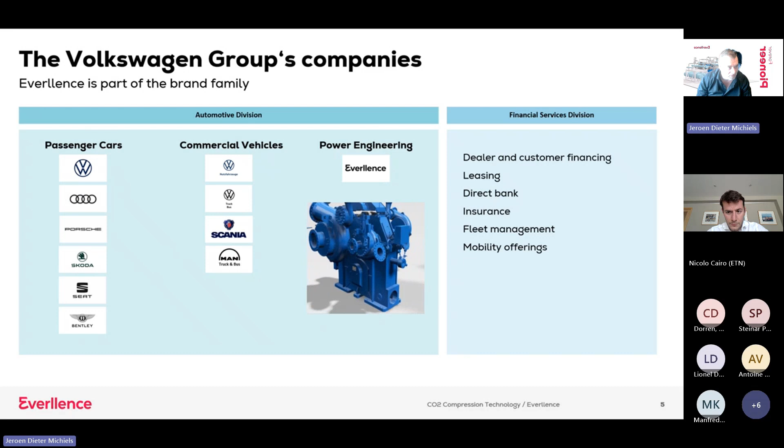So a little bit about the company. Like Nicolo said, we changed the name from MAN Energy Solutions to Everllence. It's building a new brand for a company without the MAN truck and bus idea behind it as well. So the company is a part of the Volkswagen Group. As you can see here, the passenger cars, the commercial vehicles, also known as truck and bus, and now Everllence for the engineering part. We're the smallest part of the entire group, but they see us as the engineering part of the organization.

We have roughly 15,000 people working for us, present in over 50 countries, 140 sites all around the world, existing over 260 years already. Started somewhere in Oberhausen in the St. Antony, and from there it grew, integrated several companies, parts of Sulzer, Borsig, you name it. And for now, it's also a good step to make a new name with all brands under one name.

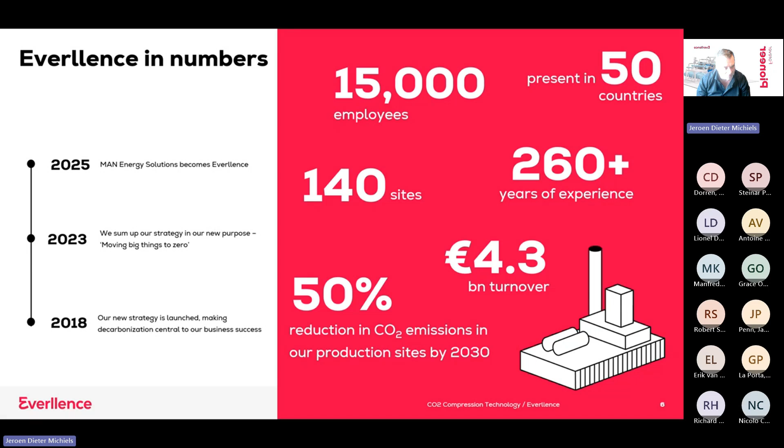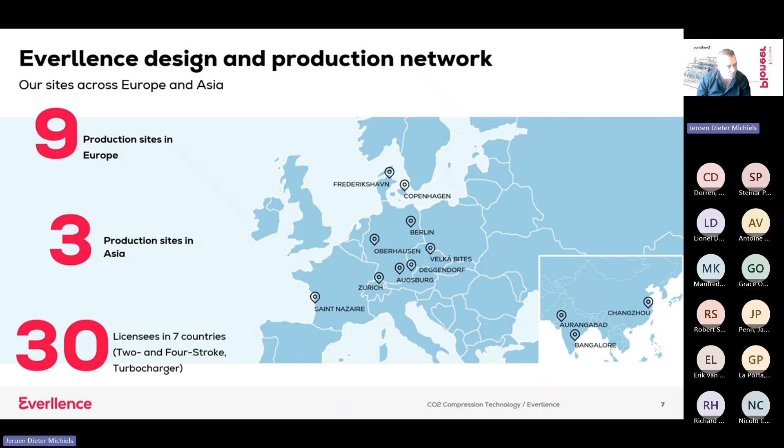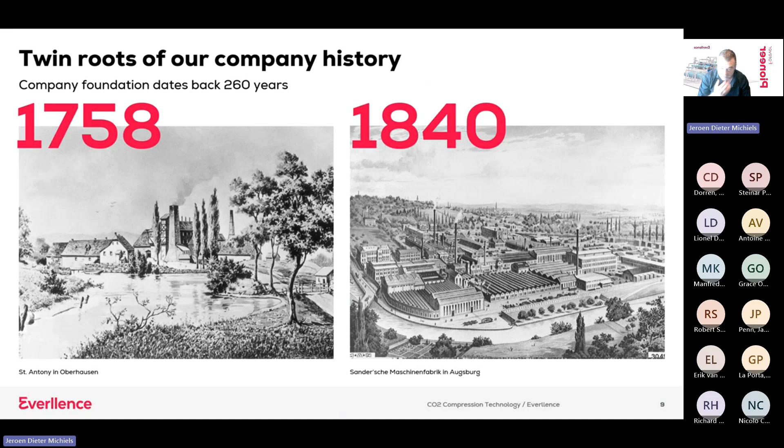These are the production locations, mainly in Europe, a few in India, one in China. We have service locations all over the world. Because we also have a marine side to our business, there are also a lot of service locations based in coastal areas. Started in 1758 at St. Antony, like I already said. Headquarters founded in Augsburg in 1840. Yeah, so this is how it all began, with Mr. Diesel in the middle of that.

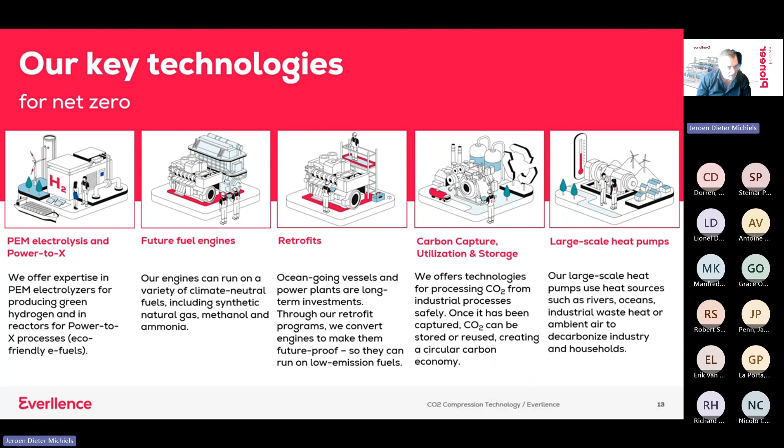Our strategic direction: moving big things to zero. We are aiming to work on decarbonization globally, and we do that with our equipment. So part of it is power to X. We're producing reactors to make methanol or SAF or other synthetic fuels. Future fuel engines for the marine side. We're developing ammonia engines right now, retrofits on ship engines so they can run dual fuel, partly on methanol, the carbon capture, of course, and large-scale heat pumps up to 100 megawatt thermal.

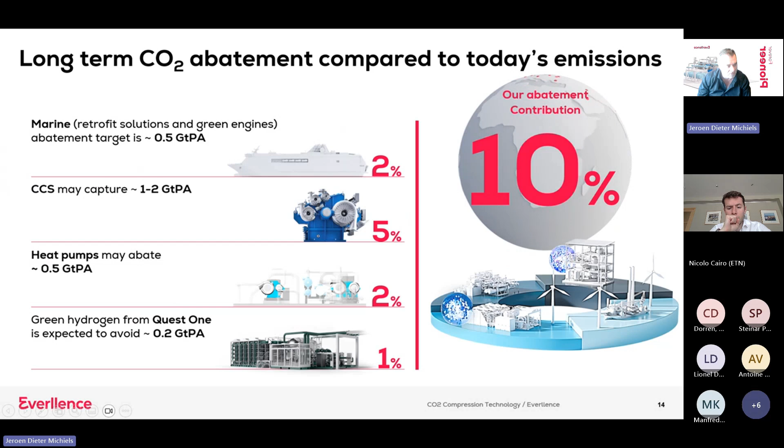Our goal is at least to decarbonize globally by 10% by the use of these equipments. So from the marine side, CCS, heat pumps, but also the electrolyzers we produce within our sister company, Quest One.

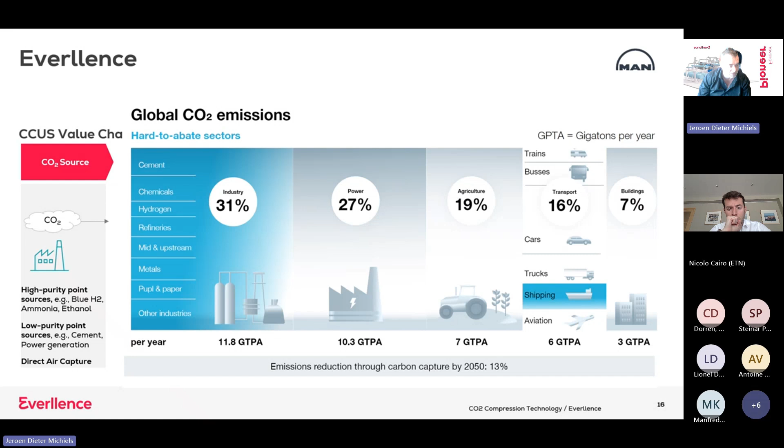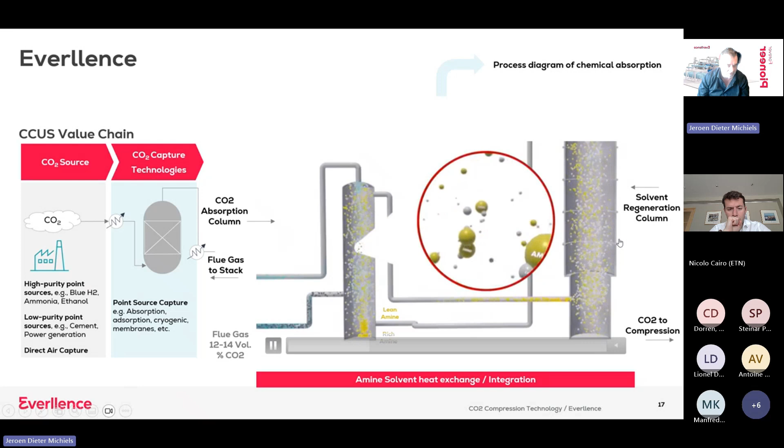Then I come to the carbon capture part. If we're looking at CCS, we first of all have to look at where CO2 is hard to abate. It's the known players, I think: the cement industry, chemicals, refineries, but also the power industry. Then you have to capture your CO2. There are several types of capturing systems on the market. This is an amine-based system based on absorption, where the CO2 is linked to amine, then freed, and the amine returned to the column. And the CO2 is then processed further to the compressor. That is where we come in.

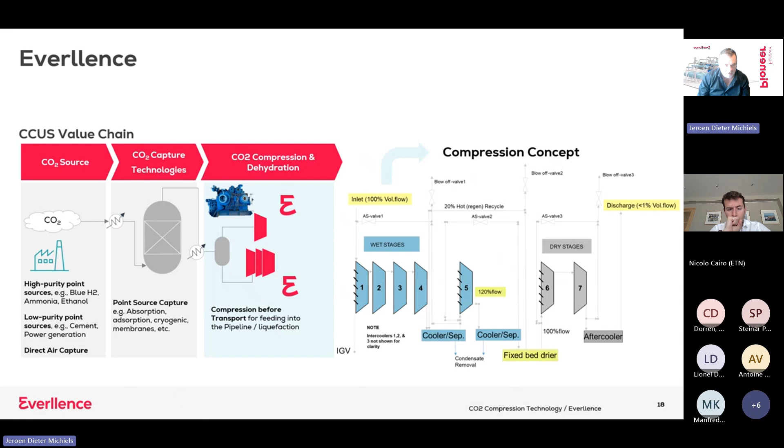We provide compressors. This is an example of a CO2 compressor, a 7-stage machine. The first 5 stages are for wet CO2 in this case, and the last 2 for dry CO2. Then if you have compressed it, you have to think, what do you want to do with it? Do you want ship transport, truck transport or pipeline? It all differs in what way you want to compress your CO2.

So there are a lot of options for the use of CO2. The main focus right now is sequestration, where you can, for instance, do what they do at Porthos and sequestrate it offshore in depleted gas fields, or onshore, which is a little bit harder to realize in the western part of Europe. Then we can also create, for instance, a liquid lake of CO2, not that popular, where the water pressure and temperature will keep it down, and dissolution, not very popular, especially with environmental groups.

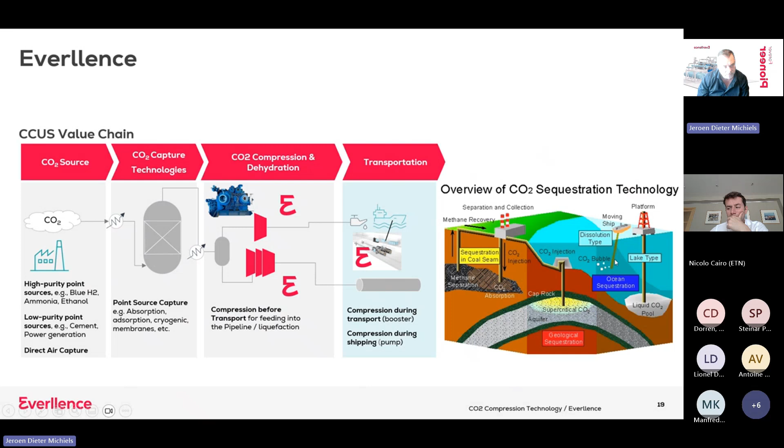Also have to look at the utilization part. So CO2 we can use in combination, for instance, with hydrogen with power to X, but also you can use it in the fertilizer industry or mineralization. There are several options for that. Only the majority of the solutions is right now sequestration.

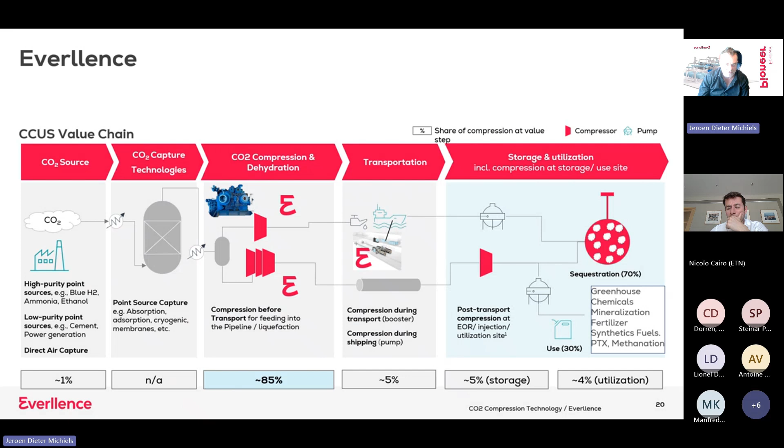Then if you want to transport it, you can make it a gaseous form for short-distance transport, similar to what happens at Porthos. Liquefaction for ship transport, for instance, Northern Lights, or supercritical for long-distance pipelines.

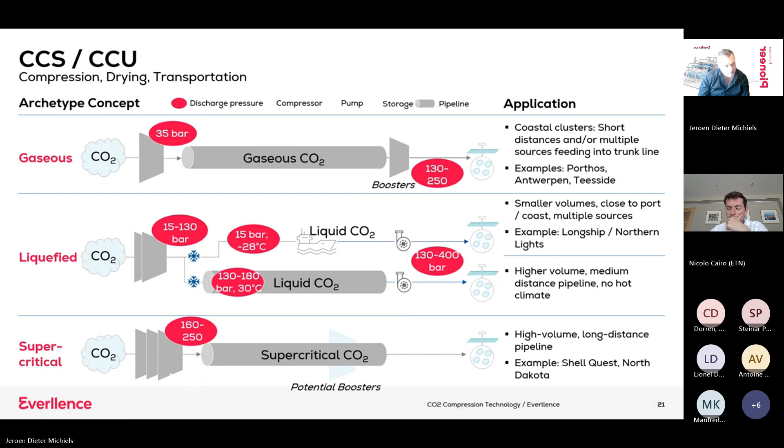Then we have to take a look at the technology readiness level. The capturing part, like I said, there are varieties of capturing systems. So absorption, membrane systems, cryogenic systems. There are a lot of new solutions coming to the market. Solutions that are made better over the years. But again, it depends on how much CO2, what is the purity of the CO2 you need. And that's an important part to look at.

If you then take a look at transport, pipeline, shipping, but also trucks and rail, but that makes it more expensive for the transport. Utilization part, there are a lot of utilization possibilities. Some are ready for market, some are still in development. And then the storage, EOR, enhanced oil recovery, is one of them, where you repressurize the oil field to take out the remaining oil, or leave it in depleted gas fields, for instance.

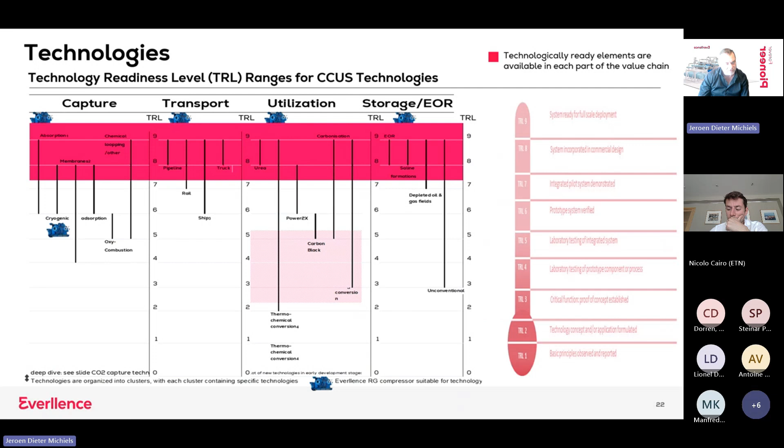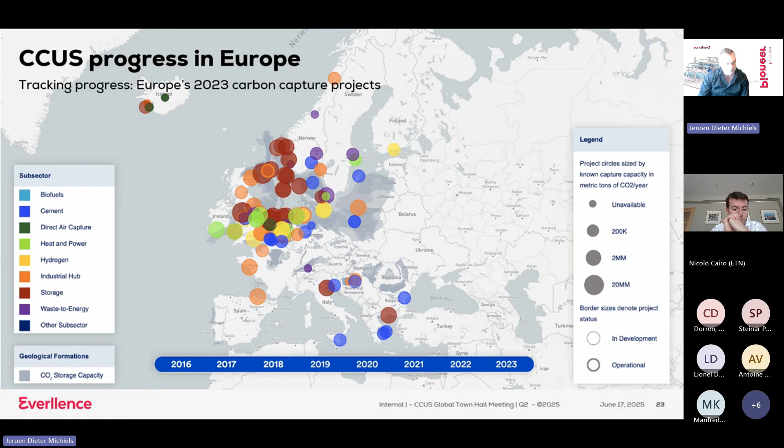So this is what happens in Europe in the last years up to 2023. A lot of projects have been developed, are under development, are being built as we speak. The Northern Lights project, that means Brevik, the cement factory, is up and running. Porthos will be ready at the beginning of next year.

Then average cost. This is an example of a calculation where a coal power plant has got a CCS project. First you have to have the capturing system, so the cost in US dollars, and the share in percentage. Then the transport and compression part, and these together are the most expensive part of such a project. Then you have your injection, monitoring, and the total sum. Of course, it depends on what kind of company or installation you're having, and where you need the carbon capture.

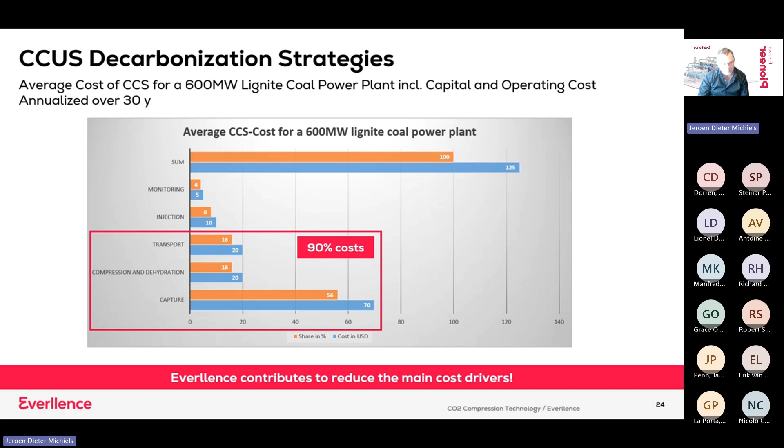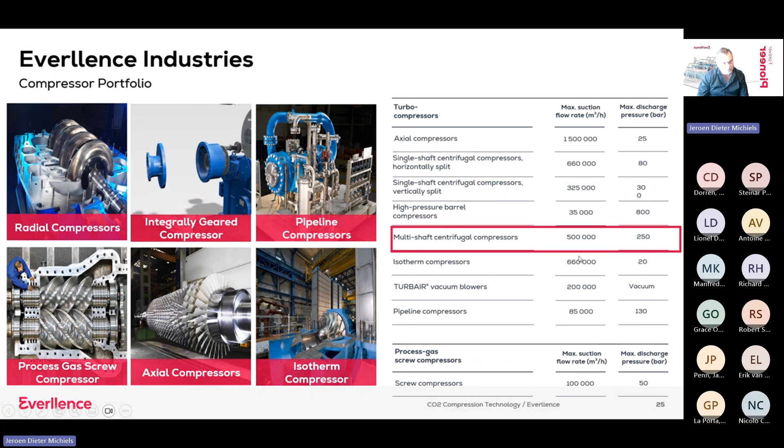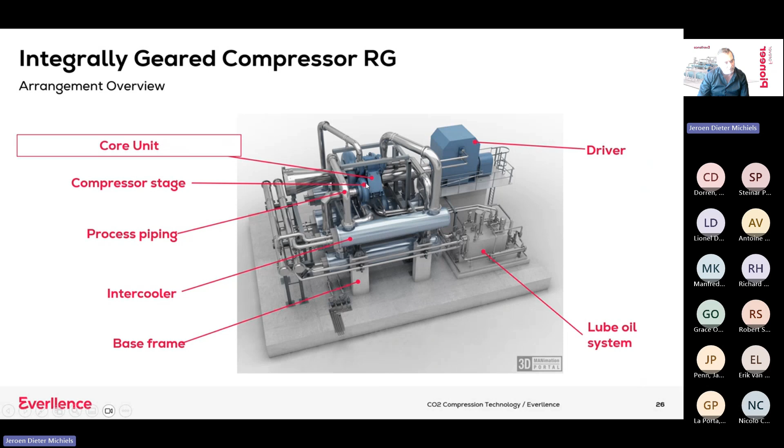We make use of an integrally geared centrifugal compressor. In principle, it's a gearbox with the bull gear driving the pinions here, where the gas is injected into the volutes and then compressed. After each stage, there's an intercooler, and then it returns back to the other side, to the next stage, and so on. We can do this up to 10 stages, but in principle, 8 would be enough.

This compressor is nothing new. We've been using it over many years for CO2, also hydrogen, nitric acid, ammonia, you name it. It's a very versatile and a very steady machine with a high availability. Can use it for liquefaction, gases, and supercritical. We can have heat recovery on this machine, less power, less OPEX. Therefore, it's a really interesting machine. It has a low footprint on the entire installation.

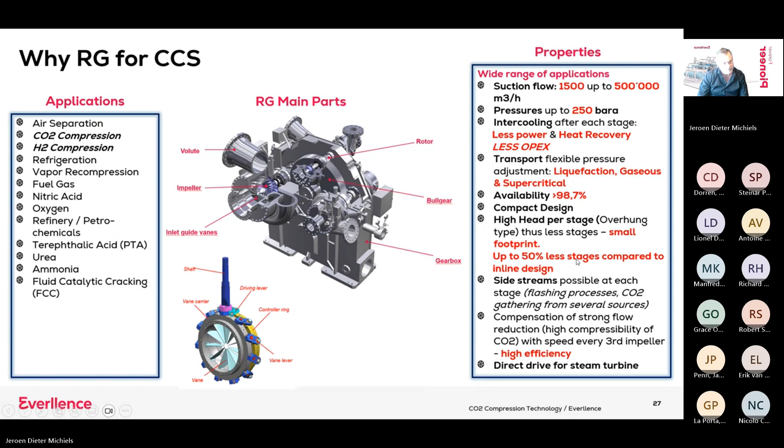And you have to take a look at the CO2 itself. CO2 is a very heavy molecule. Therefore, it's very easy to compress in big stages. And in this case, it regards compression for sequestration. Every step has an impeller, and the impeller size shrinks to a very low point where the smallest one is almost the size of a matchbox, where it runs at 40,000 RPM up to 200 bar.

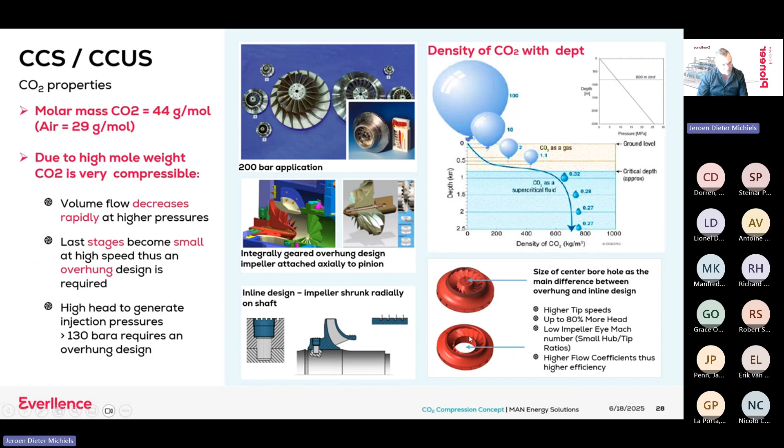The big advantage of this type of impeller is it's mounted on the front of the pinion, and therefore, if you compare it to a regular compressor impeller where it's strung onto the rotor itself, you have a much bigger surface area, and therefore can compress more and faster than a regular impeller.

If you compare it to an inline compressor that we also provide, this is the reason why we choose an integrally geared centrifugal compressor for CO2, because it needs less steps. So in 8 steps we can go up to, in this case, 160 bar, where with an inline compressor you will need 15 steps. 1 machine versus 2 machines, 1 engine, 2 gearboxes, and all this has an effect on your CAPEX and OPEX.

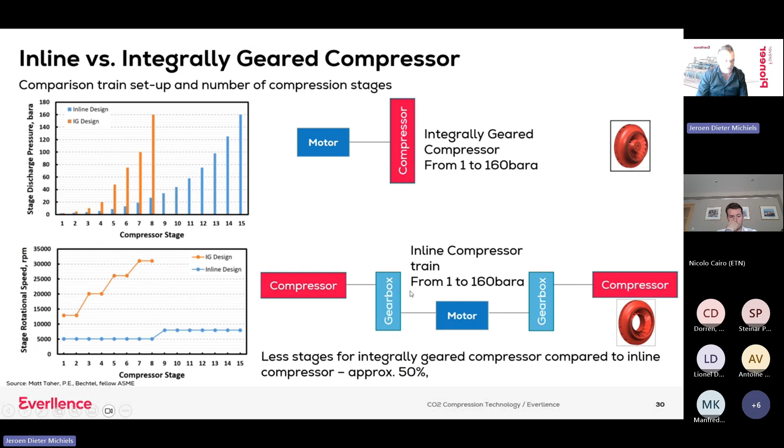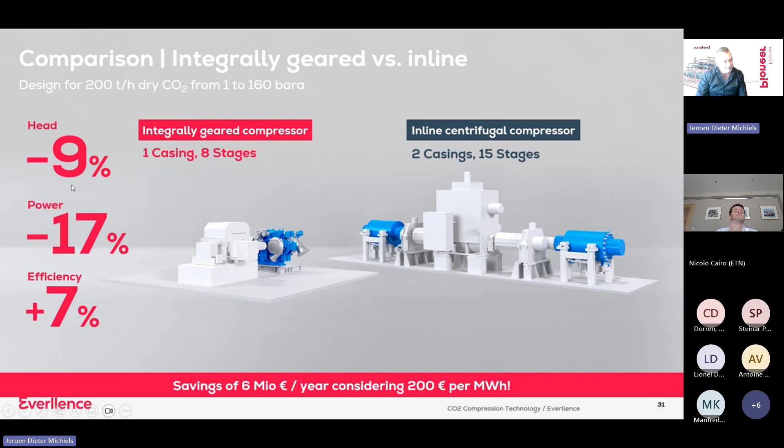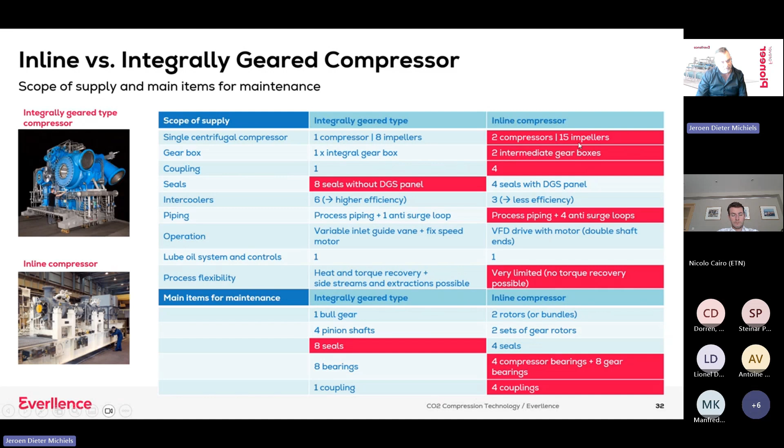So if you look at the comparison again, the integrally geared has a lower head, uses less power, and is more efficient. It needs less parts. As you can see here in the red, the amount of impellers you need, gearboxes, and so on, and a lot less people to work on it on your overhauls. So that makes it, especially for OPEX, really attractive.

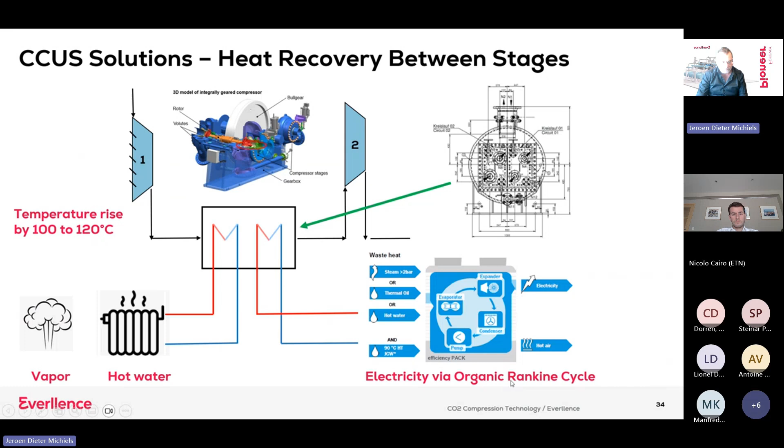We can do also heat recovery between stages, temperatures up to 120, perhaps in some cases already higher. You can produce steam or hot water. You can also have your organic Rankine cycle for energy recovery. So it's a very versatile machine.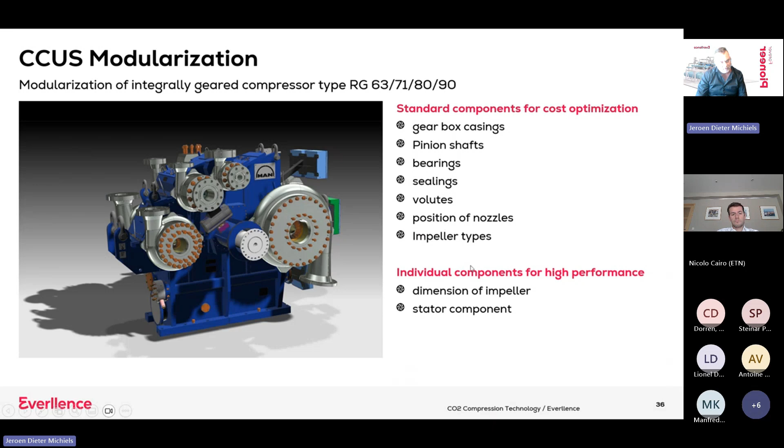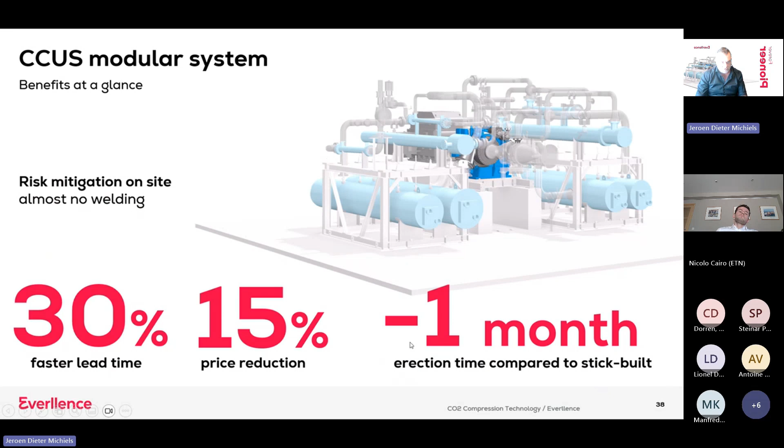We also provide modularization systems where you have standard casings, shafts, bearings, you name it. Also the piping, framework, instrumentation. That means faster lead time, price reduction, and a faster erection on site. Like I said, we have been doing this all over the world for many years.

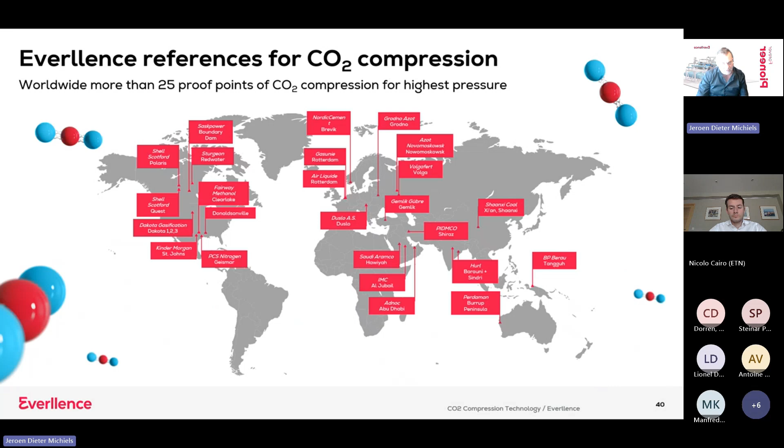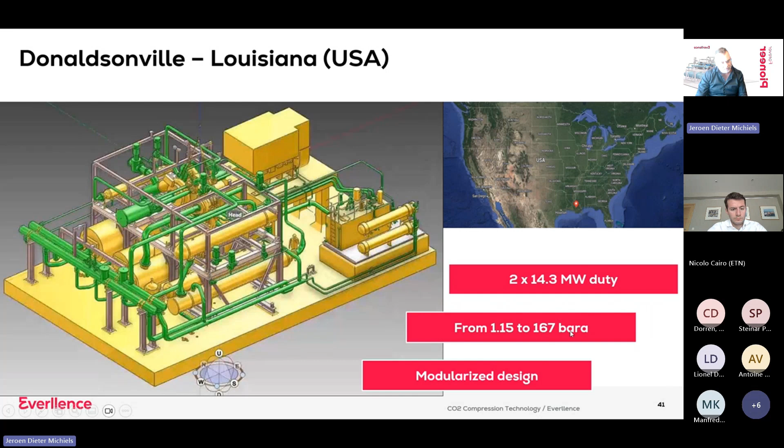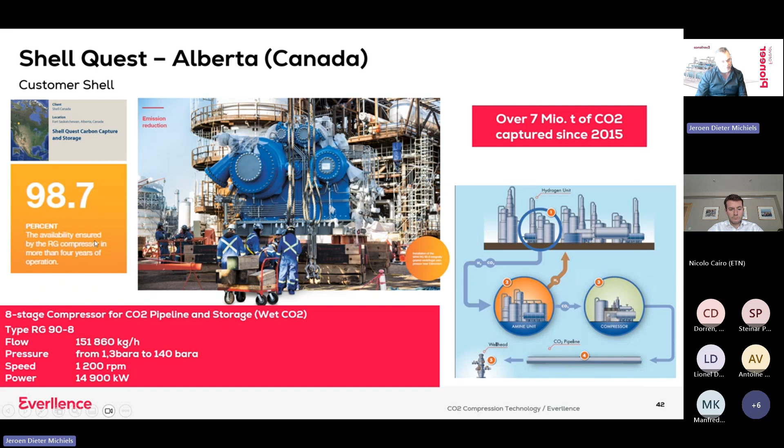This is an example of our first modularized system in the US. It's a 2 times 14.3 megawatt machine, compresses up to 167 bars. In Canada, this at Shell, this is where we got our availability for this machine, 98.7%. So we're very happy with that.

This is an example of enhanced oil recovery. You can see here that the CO2 is injected in the oil field, and the oil is then taken out. As you see here, the pipeline, 420 kilometers throughout an oil field in North Dakota.

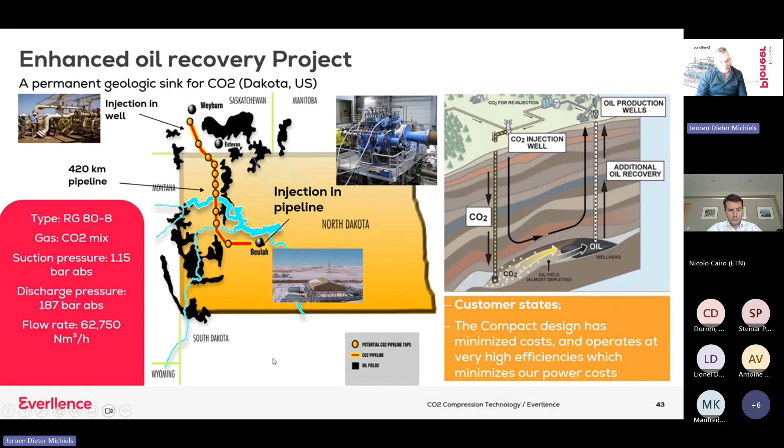This is our biggest project up to now. These are our 3 biggest machines, the RG90. That means that the first stage impeller diameter is 90 centimeters, and it has 8 stages. Here it's used also for getting the natural gas out by repressurizing it with CO2.

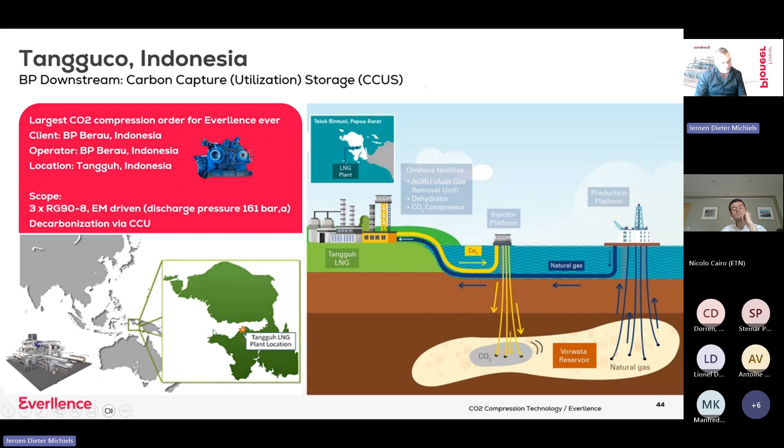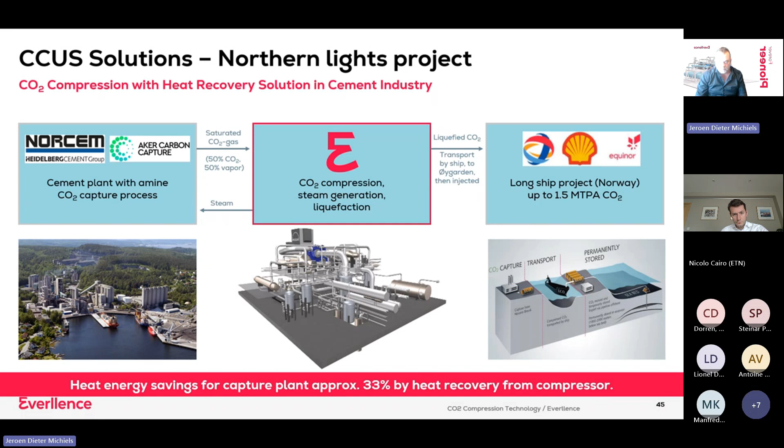This is the Northern Lights project, the cement factory, where we provided a compressor system. Here we liquefy the CO2 for ship transport. From there it goes to Øygarden. There's a compression station where it's then injected in the old gas fields. We have the cooperation here with Aker Carbon Capture, where we have heat recovery up to 33% back into the capturing system to make it more efficient.

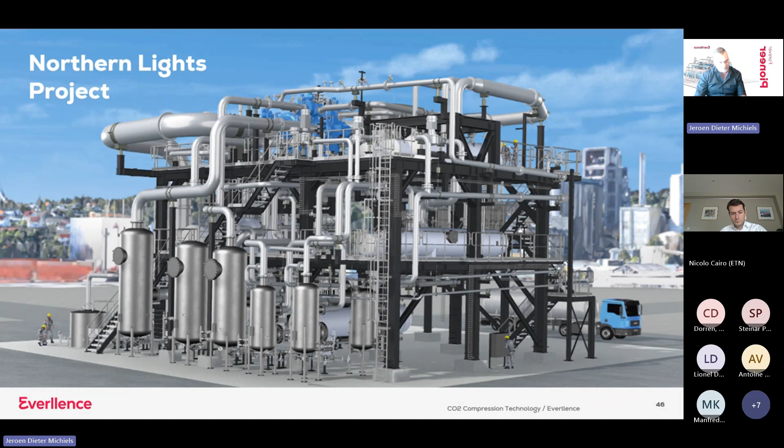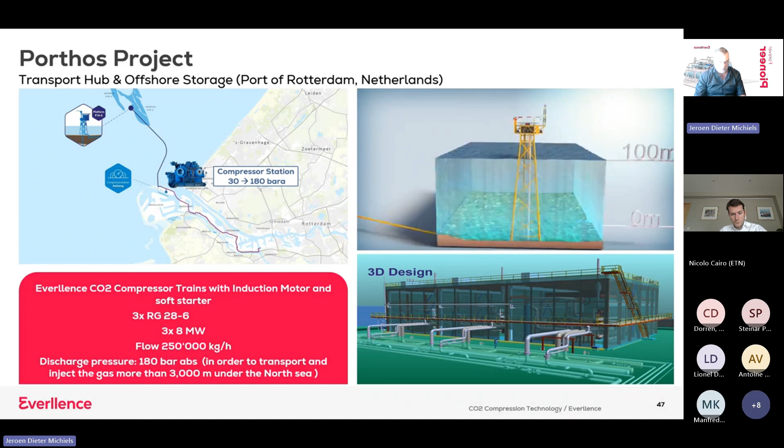There's also going to be a liquid storage facility called CO2 Next. And from here out, they're going to work towards an infrastructure for CO2, where companies can then transport their CO2 towards Porthos or Aramis to have their CO2 sequestered. It's going to be run towards Germany and perhaps connected there to a similar grid itself. So that was it in short.

Still in time? Think so. Are there any questions?

Thank you, Jeroen, for the detailed presentation on both the technical part and also the economics. Before opening, I also found interesting the connections you just reported with the Northern Lights project in Norway with Equinor, which is a project that ETN visited during its AGM with the members in March this year. So I think it's good that we have this dissemination. And with this in mind, I would like to open the floor for any questions you may have to Jeroen. Also, any comments you may have.

Are there any projects that you are working on when it comes to CCS? Any obstacles you have encountered? Well, actually, I would have a question to you, Jeroen, because you are involved in the business of this technology, and we often hear how difficult it is to, let's say, develop, but also bring to the implementation status these CCS projects, right? So how would you see the business models for CCUS nowadays in Europe? Which difficulties do you foresee for the deployment of your technology in the European market?

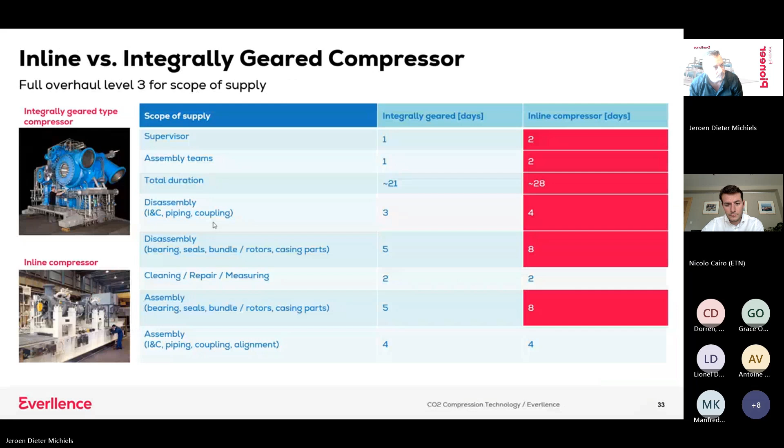Yes, I think your response was comprehensive. Thank you, Jeroen. So we still have time for any questions you may have, either on technical and non-technical topics. Also, if you want to share your own experience or relevant topics.

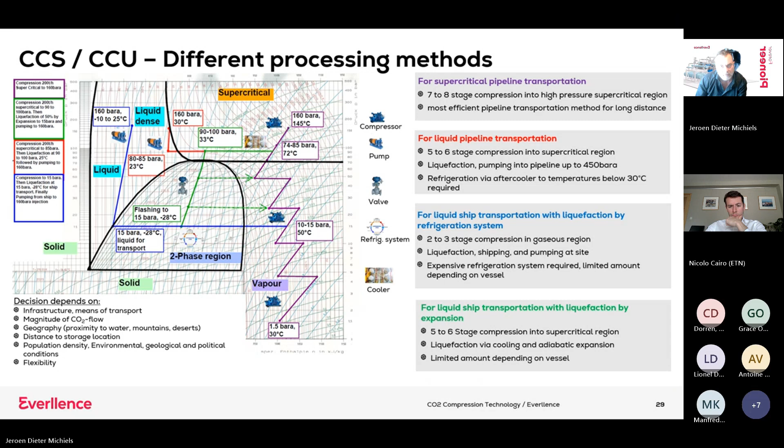So these are a few of the things that we look at, that we keep track of, and that makes it also interesting for our customers. And of course, it's important to look at what projects are going to develop that have influence on the progress of these projects, A, for the funding, and B, for the infrastructure.

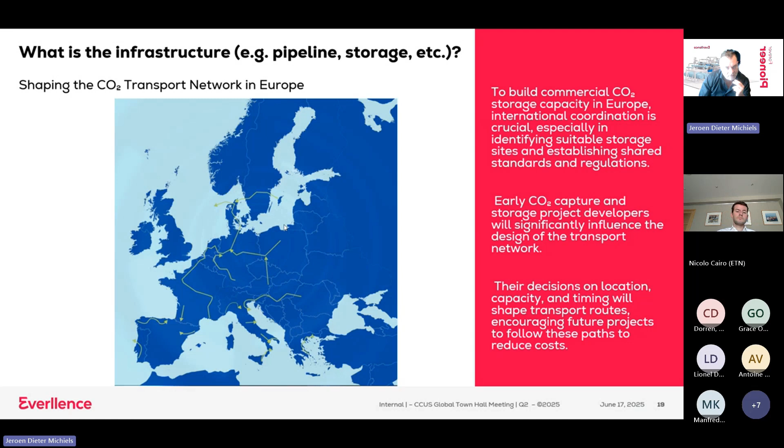Poland, for instance, is already looking at development, but on the northern side, because they then have access to the water. And if you look at all the possible storage facilities, there is a lot to be had. But again, rules and regulation, environmental questions being raised, political issues playing a part in this. It's an interesting one, and it is something that is developing in the upcoming years. An important one is the Porthos project getting a connection to Germany. And from there, you can, again, work further outwards.

Thank you for sharing this, Jeroen. That gives, from our perspective, more information in comparison to what we had as of now within ETN. So in our working group we're actually thinking about developing a report on the optimal transportation methods for CO2 for CCS GTs. Is there anybody in the audience who would like to ask a question on this content?